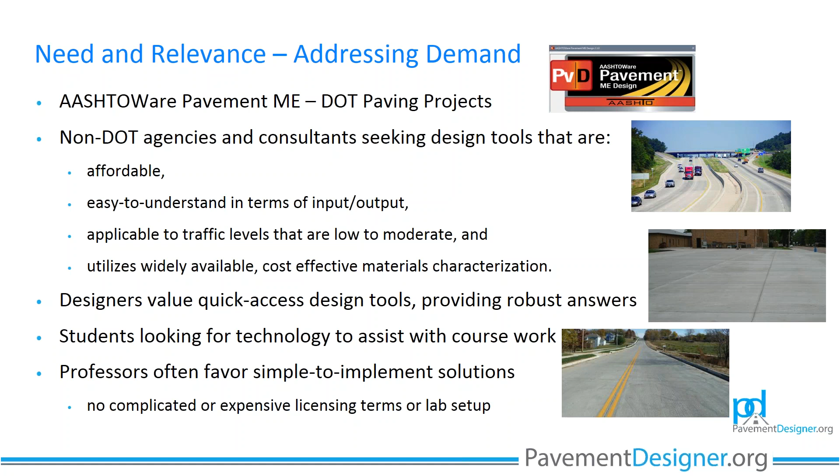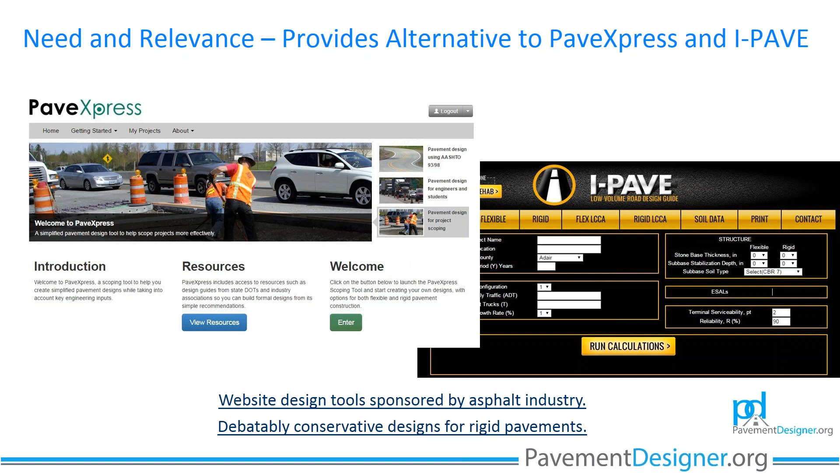to be able to understand how to do concrete paving design. Another reason we wanted to make sure there was an easily accessible and robust tool out there is because there are other tools out there sponsored by other industries. What we've found is those tools have what we consider very, very conservative designs for rigid pavements. We've looked into this extensively and did some reporting on it.

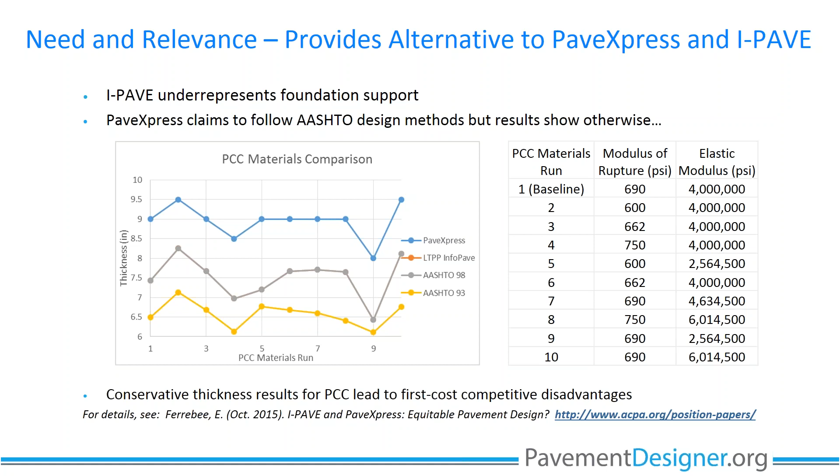So we wanted to make sure there was a robust, accurate tool available to users in the marketplace.

Another reason we wanted to put the website together is because if you were to go out and Google programs for designing concrete pavements, you'd get a lot of different software identified. Whether you're doing structural design for jointed plain concrete pavements, overlays, roller compacted, or parking lots, there was a wide array of tools available, and it could be confusing trying to figure out the best choice for software to implement.

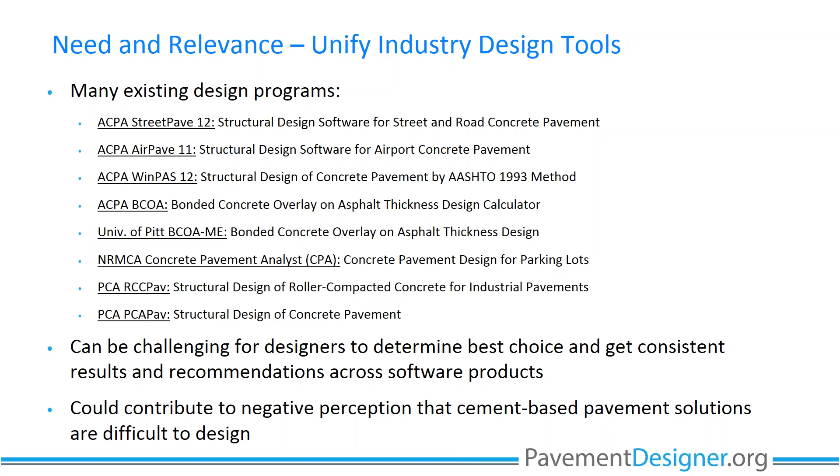That really contributed to what we'd consider a negative perception that cement-based paving solutions are difficult to design. So we wanted to make it as easy as possible for those designers that want to do concrete pavement design. Putting all of that into a single website was really the motivation.

Through our partnership with ACPA, PCA, and the RCC Council, we've developed this website for streets and roads, parking lots, and also intermodal or industrial facilities. The tools will help you design jointed plain concrete pavements - those are concrete without reinforcing steel, although they can include steel dowels at the joints - for continuous reinforced concrete pavement, concrete overlays, and also composite pavements.

These are types of pavements that have treated base materials - also roller compacted concrete, cement modified soil, cement treated base, and full depth reclamation with cement. Those are what we'd consider the composite pavements.

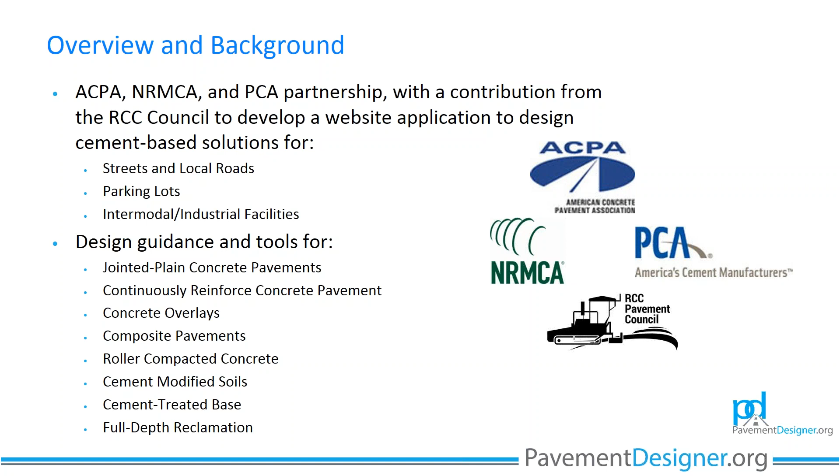The idea was to take all of these various software programs and put them into a website usable for multiple platforms, whether working off a PC, a laptop, or even a tablet. We wanted to make it as easy as possible for users to develop appropriate pavement thicknesses for concrete paving.

Now this shows what we'd consider the map for the website. Across the top, if you're doing parking lot design, street design, or intermodal design, it shows the various options available to you and the design methods available as well.

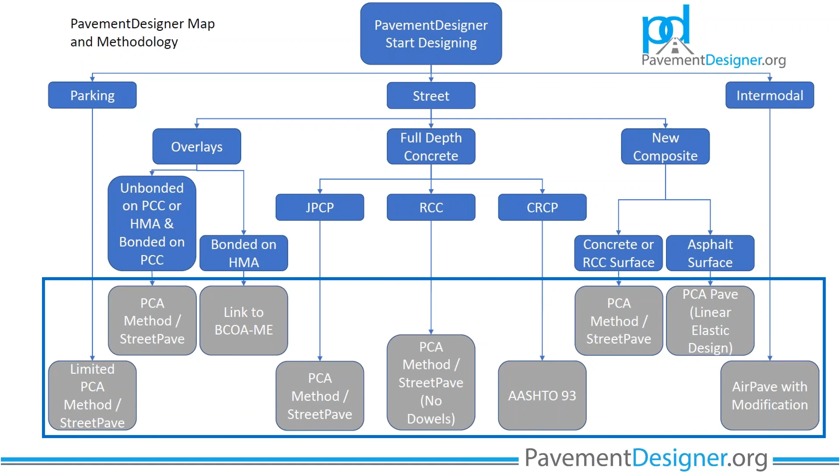You can see under street, for example, if we're doing a concrete street, we have options of jointed plain concrete pavement (JPCP), roller compacted concrete (RCC), or continuously reinforced concrete pavement (CRCP). It shows the different methodologies at the bottom for each of those designs.

Concrete pavement thickness design basically considers two different types of failure modes: one would be transverse cracks at mid-slab, and also faulting, which is typically a result of under-slab erosion.

The analyses we'll be performing today during the demonstration are very robust, like I've mentioned before, and it roots back to the 1960s PCA method for fatigue and faulting design, with some enhancements over the years. That design is really tailored for lower volume, low to moderate traffic volume parking lots and streets.

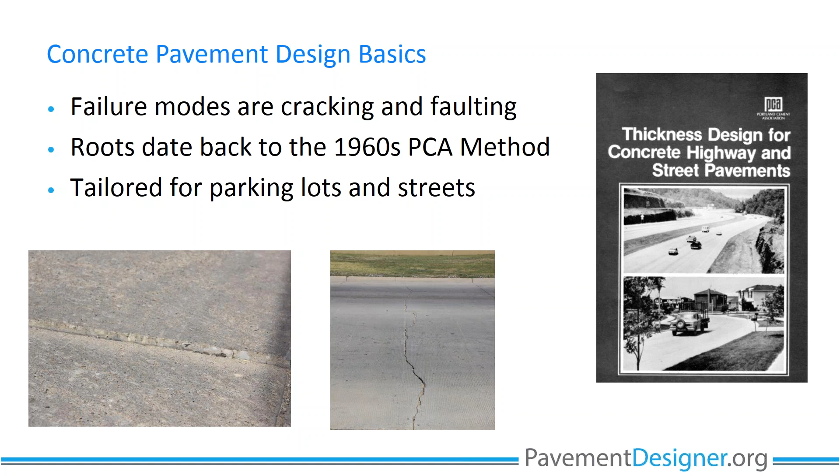When we're looking at determining fatigue properties or fatigue failure mode, we use what's called the limiting stress ratio. That's a calculated stress based on the loads on the pavement from the axles, divided by the concrete strength. We're trying to minimize that stress ratio by providing sufficient thickness to mitigate mid-slab fatigue cracks that can occur.

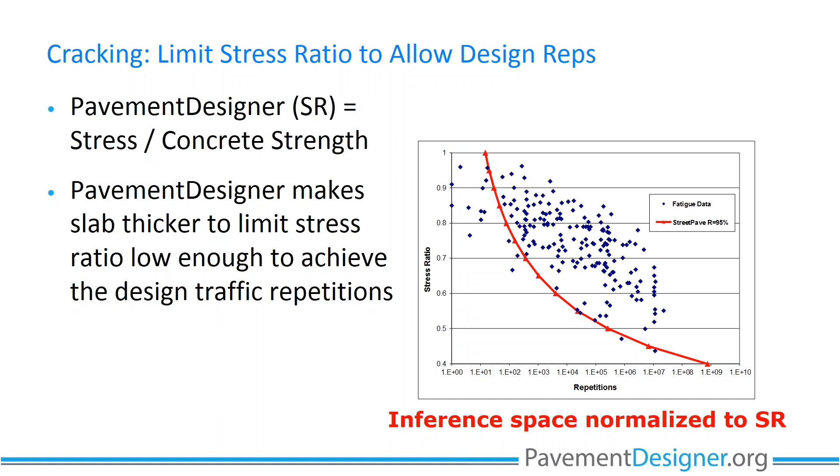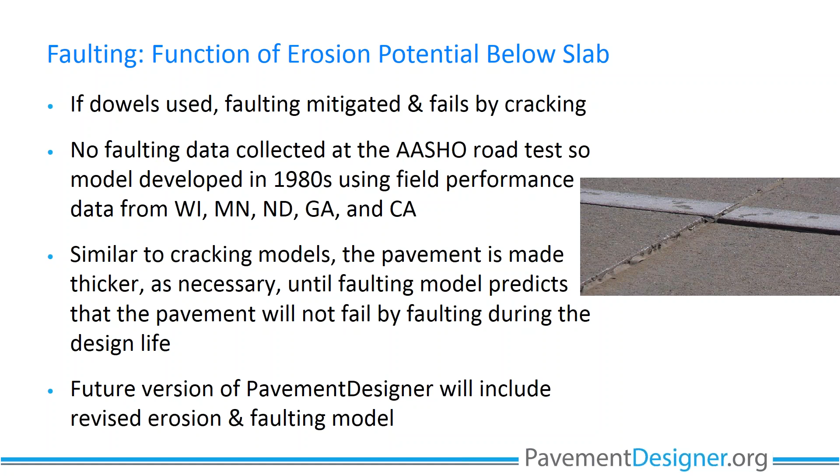We'll show you that a little bit further when we get into the actual design.

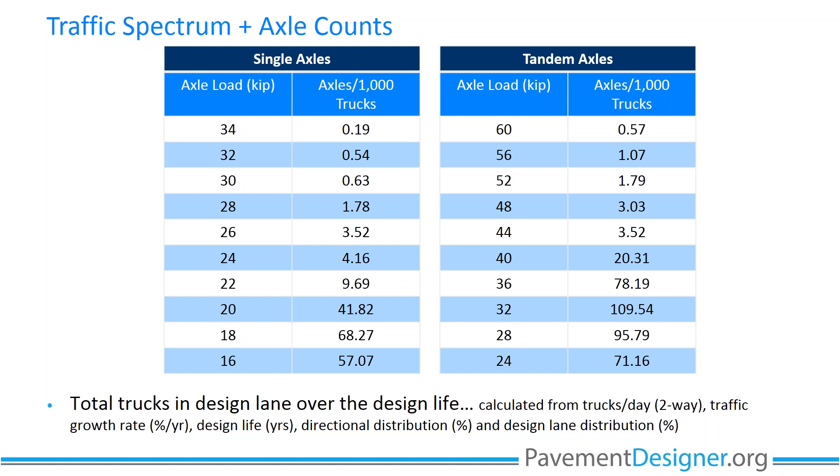It's important to understand the basis of the pavementdesigner.org website and where you can go for further reference when you're actually doing the design.

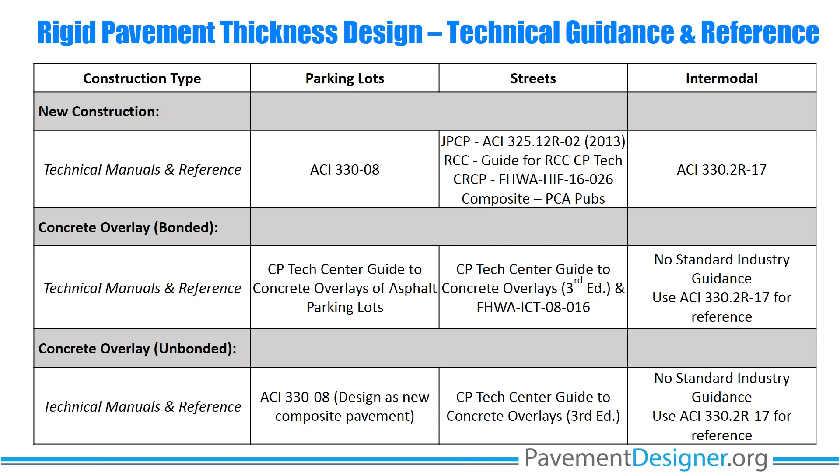Now, when we're constructing or designing new parking lots, good reference material is the ACI 330-08 Design Guidance for Conventional Concrete Parking Lots. This is developed by the American Concrete Institute, and you can obtain it through the concrete.org website.

This reference has great information on the design. It also has design tables, so if you just need to do a very quick design and you know your traffic and soil conditions, you can enter a table and determine what thickness of concrete you need. If you need to go a little further, you can jump into the pavementdesigner.org website and actually conduct a design there.

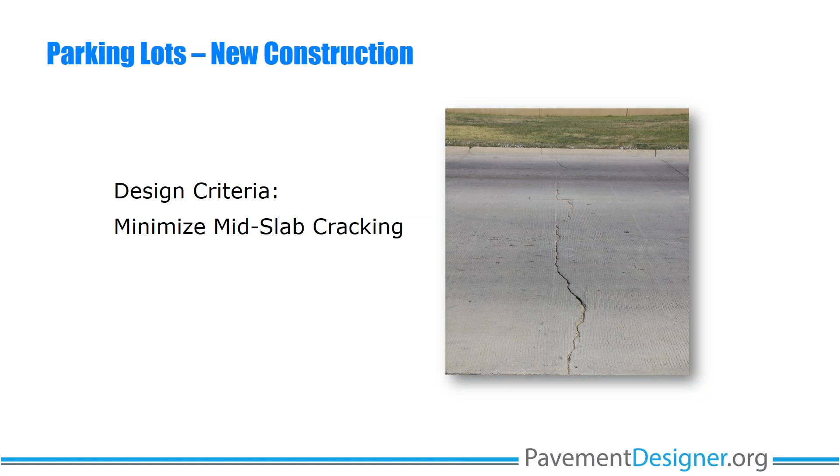When we're doing parking lots, the design criteria we're looking at is minimizing mid-slab cracking. Typically in lower volume parking lots, faulting is not an issue, and we can mitigate potential erosion issues just by doing subgrade stabilization or putting a non-erodible base underneath our parking lot. So faulting is not considered as a design criteria in parking lots in pavementdesigner.org.

NRMCA has a lot of really good information on how to design parking lots. We have an ACI 330 quick reference guide, a frequently asked questions guide, and collateral that talks about lighting benefits. We also offer a design assistance program where we can help you design that parking lot, making sure you're using all the right inputs and specifying all the appropriate materials and construction properties in your specification.

You can go to the paveahead.com website to get that design assistance. Just simply fill in your information and it'll send us an email, and we'll get back to you to help you design your project.

Now, if we're doing new construction for a street and we're doing a jointed plain concrete pavement, then the ACI 325.12R guide is what we recommend for reference.

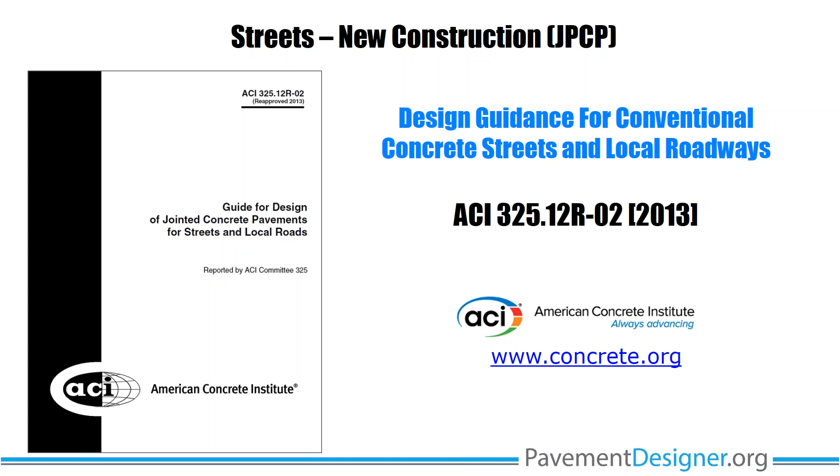When we're designing streets, in terms of new construction for jointed plain concrete, our design criteria is to minimize faulting and minimize mid-slab cracking. Those are the two failure modes considered, and I'll show you how you can see your fatigue life and erosion life as it develops over its design life when we do the demonstration of the program.

Again, NRMCA has some good technical support for designing concrete streets. We have a rigid pavement technical assistance resource for local jurisdictions. You can get that at paveahead.com under the resources page. It has various tabs within that document that help in terms of how to design, how to classify traffic, when to use a sub base or not, when to use dowels or not. It has a lot of really good information for those just getting started with designing and constructing concrete pavements.

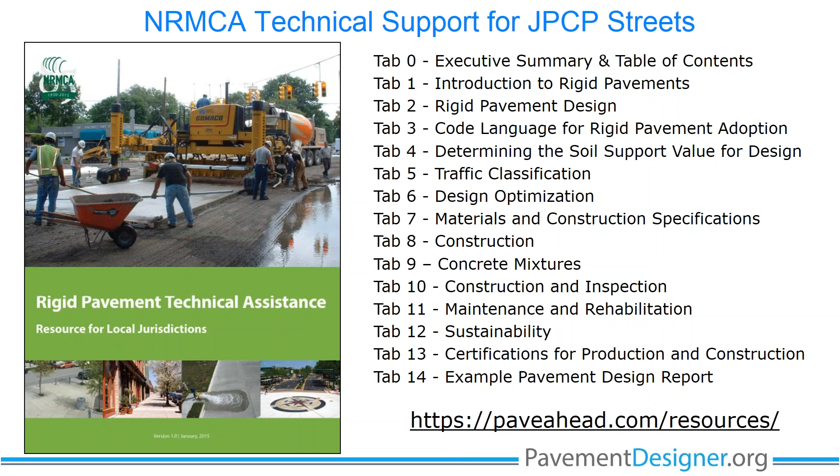Now, if we're going to design a continuously reinforced concrete pavement for new construction in the street, we recommend utilizing the FHWA's report for continuous reinforced concrete pavement. It's design guidelines for construction, maintenance, and rehabilitation. You can also go to the crcpavement.org website.

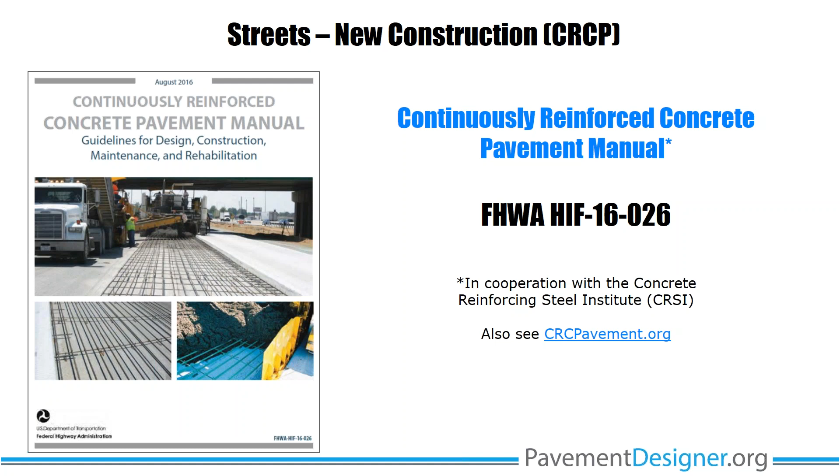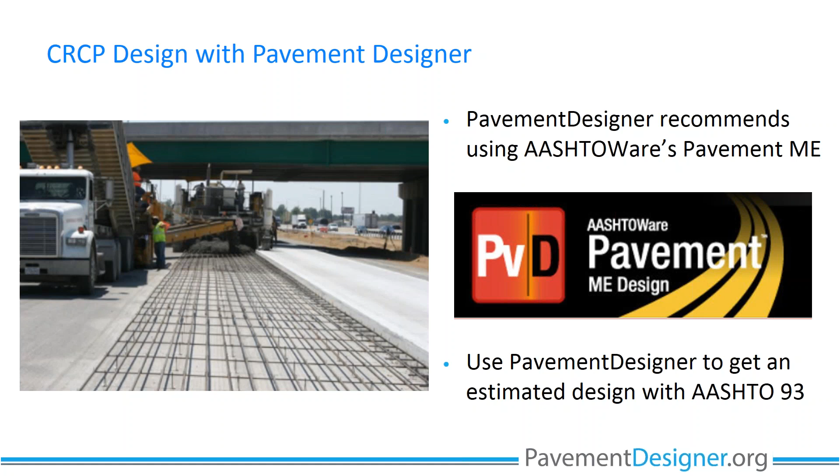Now, I will say, when you design using pavementdesigner.org doing CRC pavement, the website will pop up a little box that says we really recommend using AASHTO Ware's Pavement ME, but if you want to go ahead and design a CRC pavement with pavementdesigner.org, you can do that, but we're going to be utilizing in that software the AASHTO 93 design guidance.

What does that utilize? Well, you get your steel percentage based upon the steel reinforcement by crack spacing, maximum crack width, and the maximum steel stress. So again, we really typically recommend that you use the AASHTO Pavement ME for CRC design, but you can use pavementdesigner.org to get a quick and dirty check.

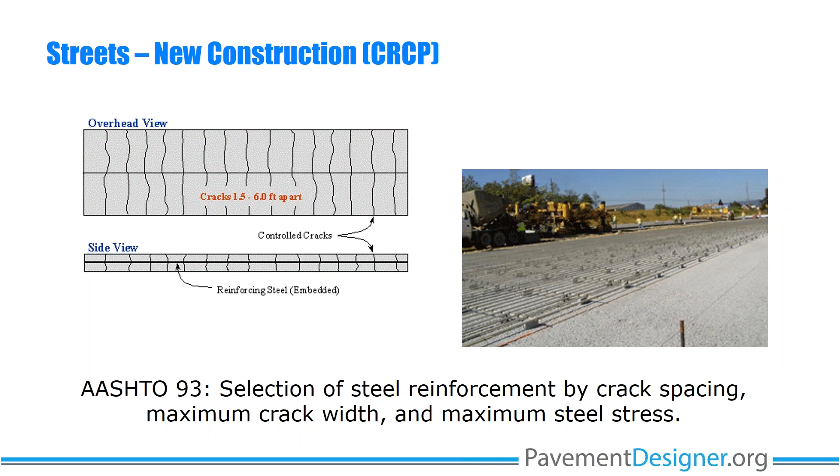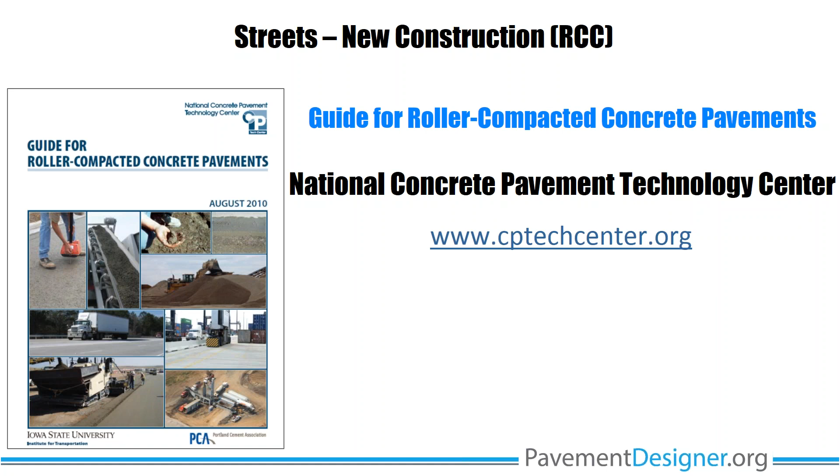Also, if you're doing a street new construction and want to use roller compacted concrete, you can choose that. The reference I would recommend is the National Concrete Pavement Technology Center's Guide for Roller Compacted Concrete. When designing RCC for a new street, the design criteria is faulting and mid-slab cracking.

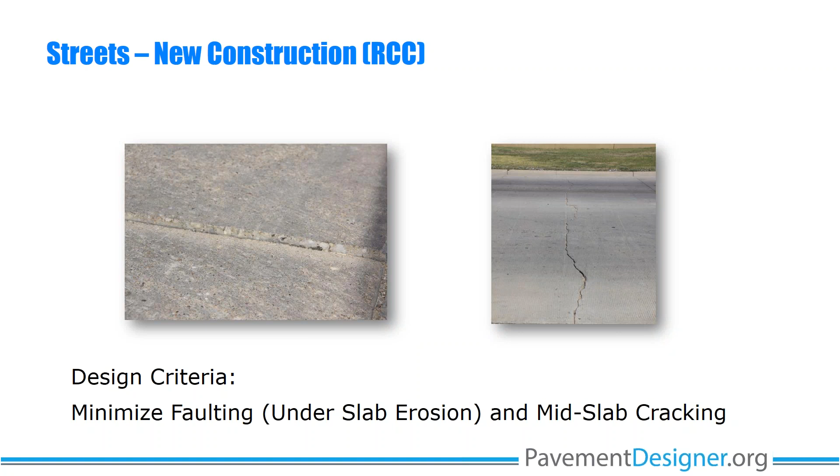And then lastly, for streets, when doing new construction using a composite pavement, typically that is when we are doing full depth reclamation with cement and then putting a thin concrete surface on top. We can also design using a cement modified soil or a cement treated base. The reference for full depth reclamation comes from the National Concrete Pavement Technology Center in conjunction with the Portland Cement Association.

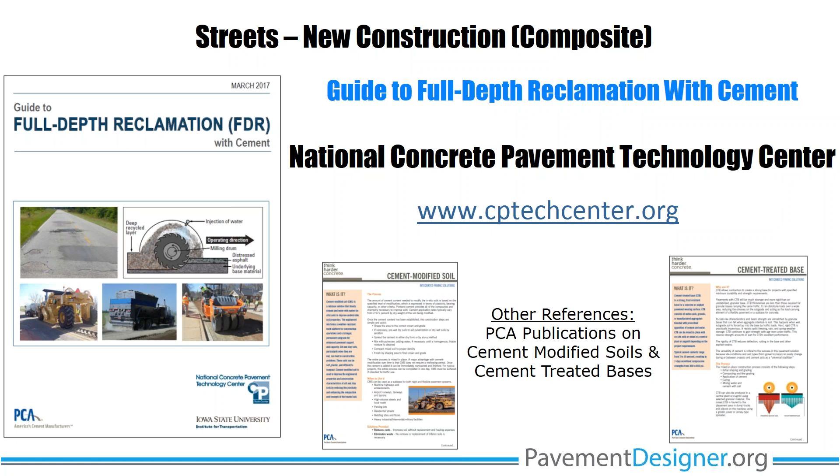That report is what we recommend for FDR. If you're using cement modified soil or cement treated base, reference material from PCA can also be utilized to help you with that design methodology.

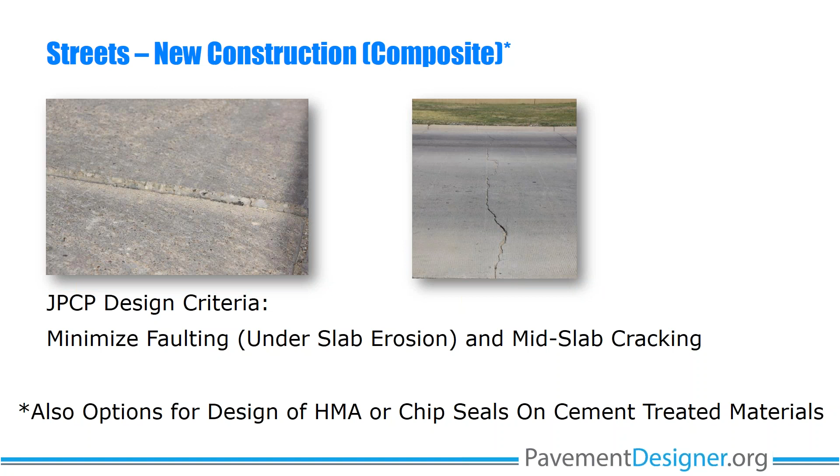When we're looking at jointed plain concrete in the new composite paving design, what we're using as a failure criteria is faulting and mid-slab cracking. We do have in pavementdesigner.org options for design of a hot mix asphalt surface or a chip seal surface on top of treated base materials. Probably won't have time to demo that option today, but in future webinars we'll do that.

Now, when we're doing concrete overlays, particularly in parking lots, the reference we suggest is the National Concrete Pavement Technology Center's Guide to Concrete Overlays of Asphalt Parking Lots, or what we call the Green Book. This is a great book with design tables in it as well. If you just need to do a very quick design, you can enter into tables. If you need a more robust design, you can utilize pavementdesigner.org. This is for bonded concrete overlays on asphalt.

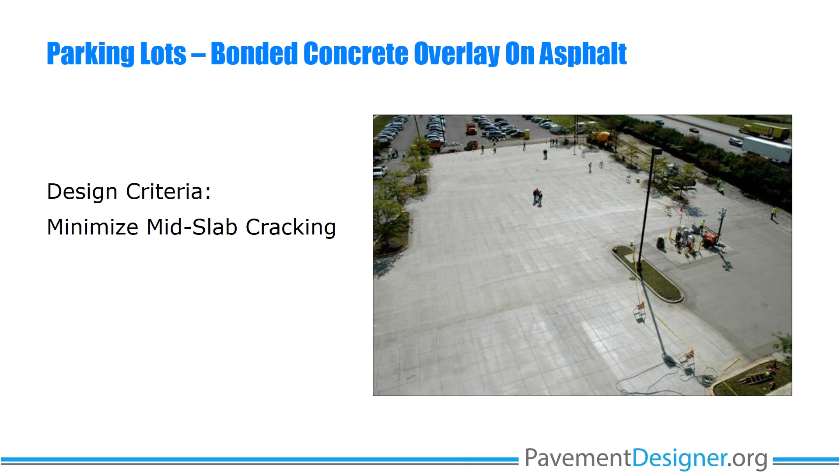Typically, the design criteria used there is mid-slab cracking. I'll show you briefly in the demonstration that there is another website that we link to when doing bonded concrete on asphalt, and I'll show you that during the demonstration.

If you're doing bonded and unbonded concrete overlays, either on concrete or asphalt for a street, there's another guide by the CP Tech Center, what we call the Blue Book, 3rd edition. Utilize that reference. There's a little bit of repeated information between the Green Book and the Blue Book, but they really have two separate purposes. So if you're going to be doing an overlay for a street, use the Blue Book.

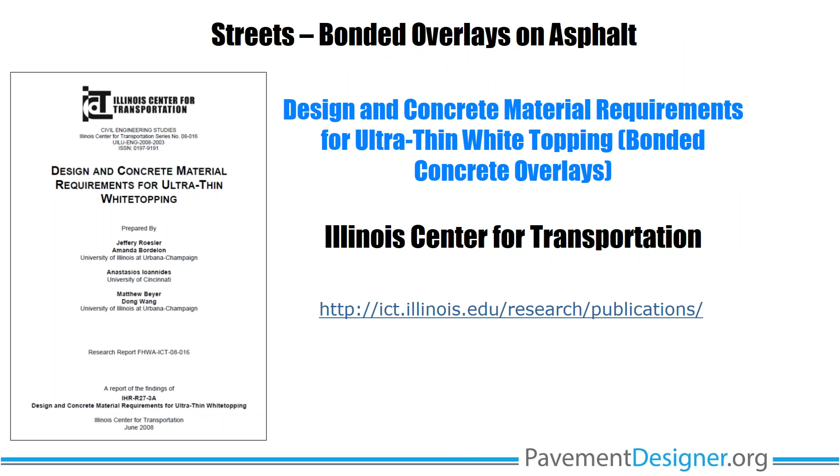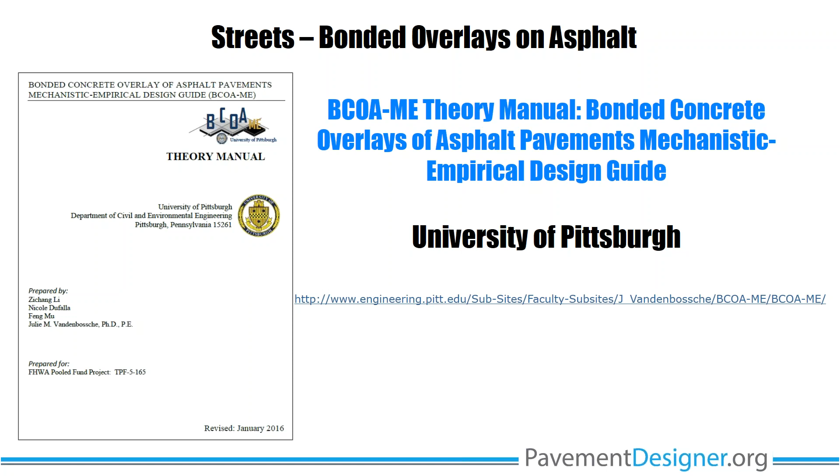More information for streets on bonded overlays of asphalt: the Illinois Center for Transportation has a great reference there. It was published in 2008, but still has very good reference and gets into a little bit of the design theory, as well as the University of Pittsburgh's BCOA-ME program that we transfer you to in pavementdesigner.org, which also has a theory guide for reference. So that's a good one. When we're doing bonded concrete on asphalt for streets, there's 2 or 3 good references for you there.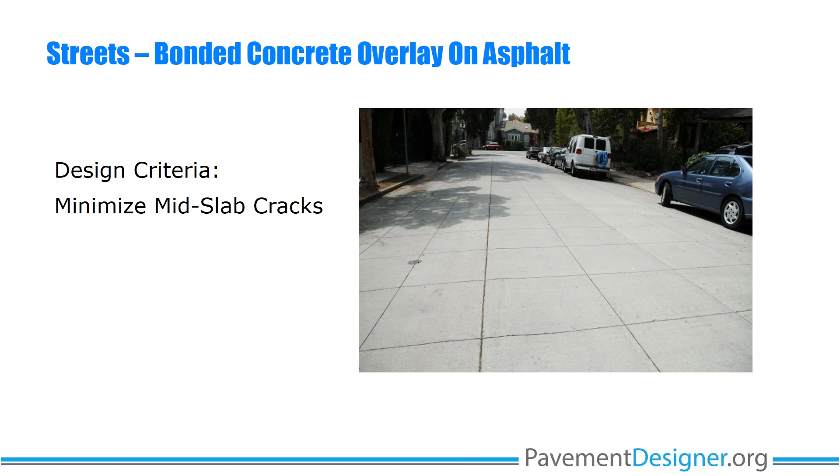When we're doing bonded concrete on asphalt for streets, the design criteria we're designing for is minimizing mid-slab cracks. For intermodal new construction for jointed plain concrete, the reference we suggest is ACI 330.2R. This is different than the ACI 330-08 for standard parking lots. This is for industrial and trucking facilities.

A lot of really good reference information in there for these more heavy-duty designs. Here, what we look at is focusing on minimizing cracking through that stress ratio. We do that in the other designs too, but it's done kind of behind the scenes. On the intermodal design, it shows you very plainly what the stresses are that are calculated for various configured heavy non-over-the-road type vehicles, those being gantry cranes, forklifts, and things of that nature. I'll do a quick demonstration of that as well.

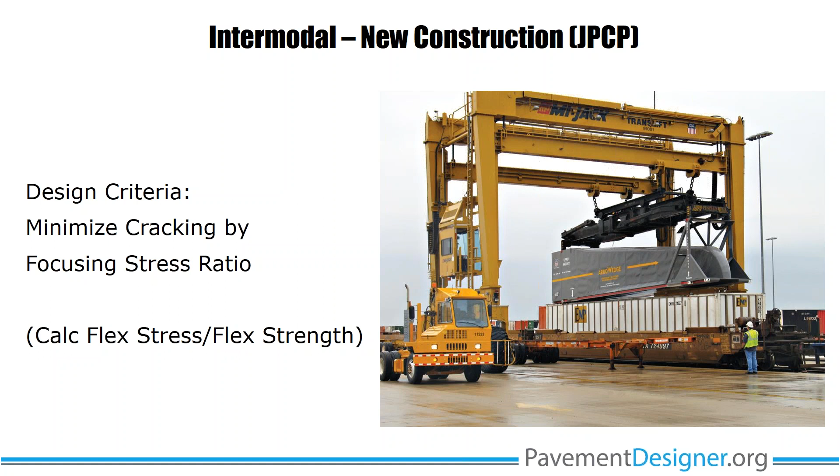One thing we have not talked about is pervious concrete. Pavementdesigner.org was not really developed for doing pervious concrete design, although it can do the structural design. Pervious concrete is a no-fines concrete that allows water to flow through it, then through a permeable base material and into the subgrade and down to the water table.

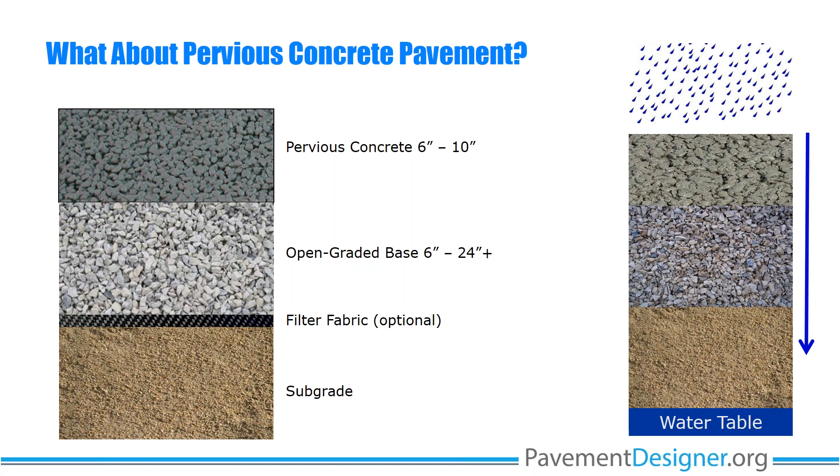There's a couple of different ways that you design pervious concrete. You do have to do a structural design to make sure it can handle the traffic conditions, and you can utilize pavementdesigner.org for that. But that's really for those who understand the material properties of pervious concrete. If you have not done that, I would suggest you seek out some design assistance through NRMCA or some of our partner associations.

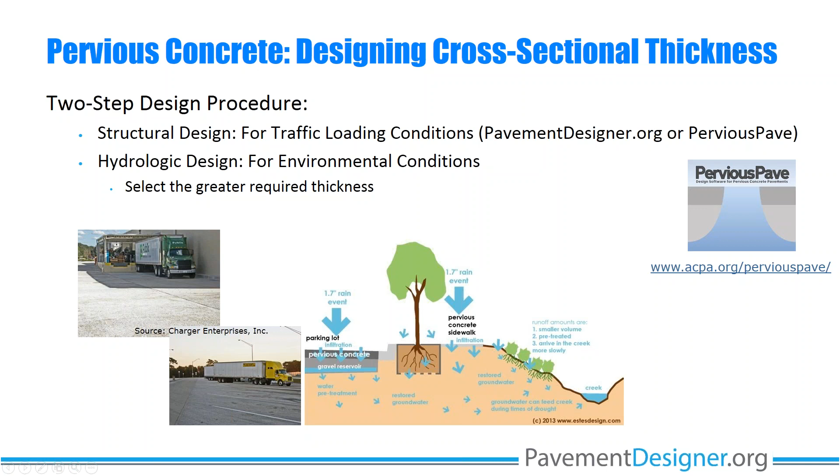We also have to do a hydrologic design for the environmental conditions, so we understand whether the pavement and base can handle the water being discharged onto the pavement. You can utilize ACPA's Pervious Pave to do both a structural design and a hydrologic design. There are other types of design methodologies out there for pervious pavement. If you need help, you can go through the ACI 522 R-10 report, or just contact one of the partner associations, and we'll be glad to help you.

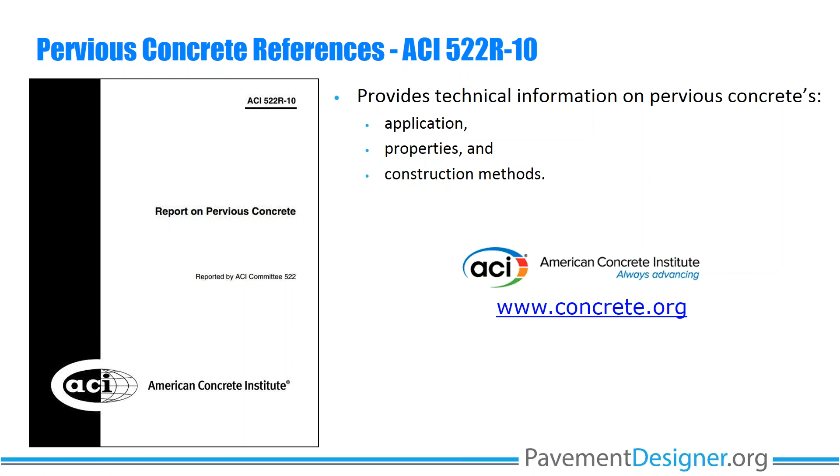In summary, pavementdesigner.org's primary audience is really city, county, and consultant engineers who are designing concrete pavements—not really for highway type design. A secondary audience would be professors and students. The goal was to unify these design methods out there, providing industry promoters and our primary audience, those designers, a single source to direct target audiences to get robust and consistent answers, and we think that's really important.

We made it a web-based platform so it appeals to folks who have been using the various concrete pavement softwares in the past, and also to future generations of design engineers. We had great broad industry support from all the different associations and from many of the member companies in those associations as well. Most importantly, the website is free and easily accessible across all different types of platforms. That was really important to us—to make sure it was out there for people to utilize and give what we considered very robust and appropriate designs for their conditions.

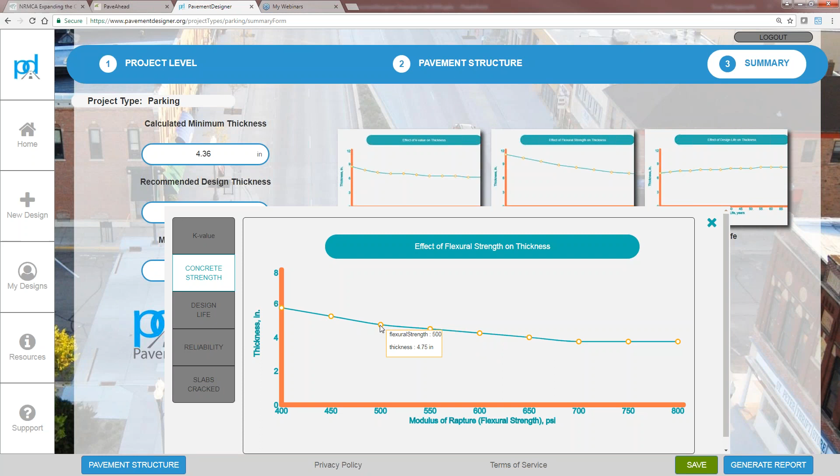If we were actually to change that, let's say, to a 500 psi flexural strength, what would that do to our design thickness? It shows there that it would increase to 4.75 inches. So we can look at various sensitivity plots.

Here's one for design life. You can see that once you get past about 20 years, the design is fairly insensitive to the design life.

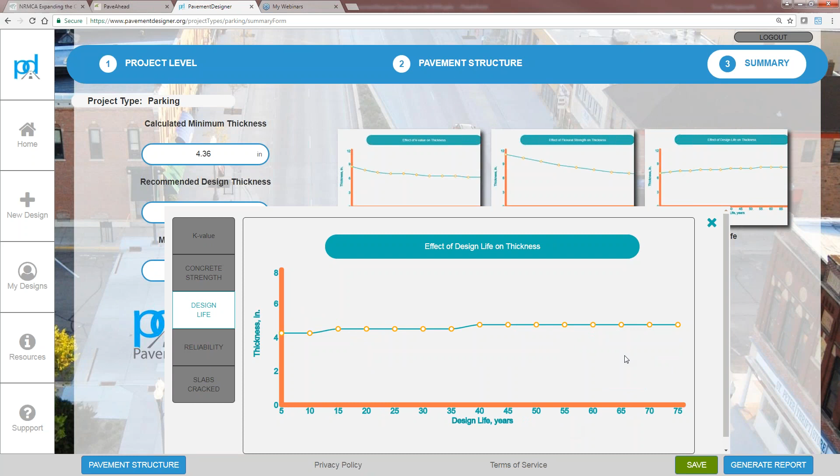Now, what we can do at this point is generate a report. I'll show you that when we get to the streets and roads section.

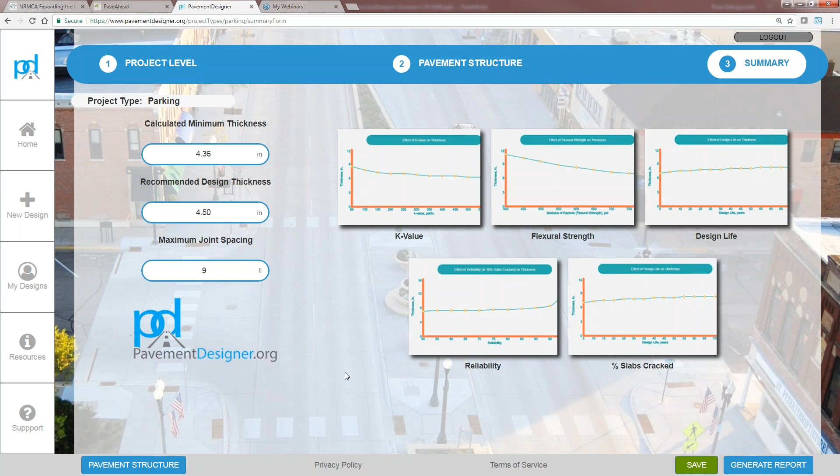Okay, so we can save this design if we want. We'll just call it the demo parking, that's what we input when we did our new design. We'll save that. It tells us up here on the right that the design was successfully saved. And if we went back to our My Designs, we would see that demo parking show up under My Design.

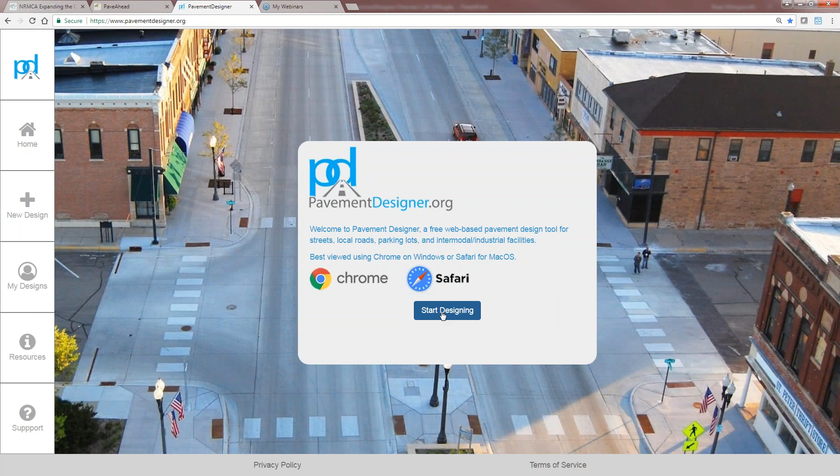Okay, let's go back to our home screen. And we will start another design. This time, we'll start a concrete street design.

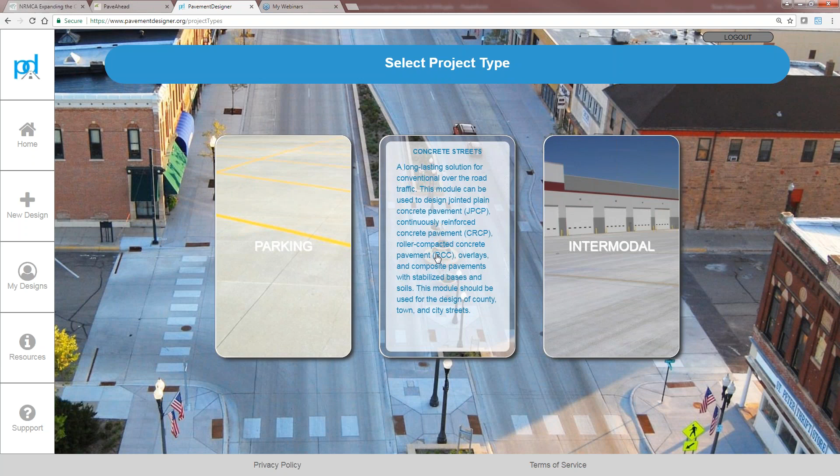When it comes here, if we're going to do a street, then we have the option of doing a concrete overlay, just a typical concrete street, or a new composite pavement. What we'll design here will be a concrete street, and we can do either a jointed plain, an RCC, or continuously reinforced.

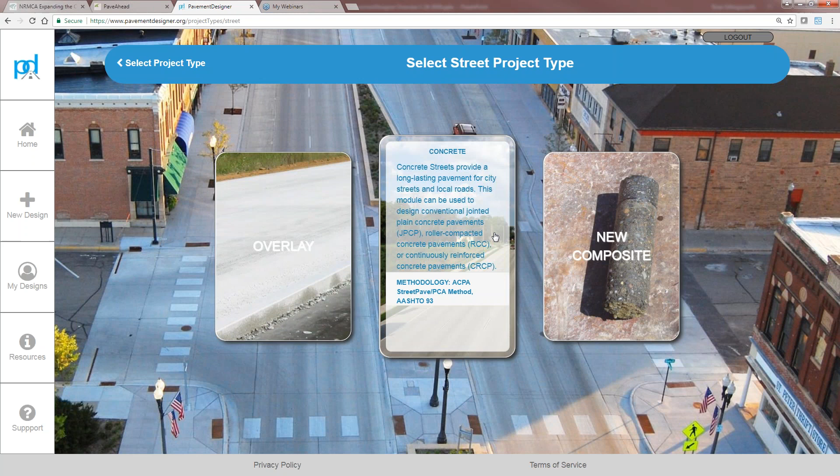So again, this screen should look somewhat familiar. It has a few more inputs than the parking lot screen did, because we wanted to simplify the parking lot as much as possible. But here you have to input information about your traffic, some of those global inputs like our reliability, and then we'll move on to the pavement structure once we do that.

Now, under the select spectrum, we have residential, collector, minor arterial, or major arterial. If we were to change one of those, you would see our traffic summary details on the right-hand side change. So what we're going to go to here is a collector street, and you should see some numbers change on the right-hand side under the traffic summary details.

So now what we have is our axle distribution per 1,000 trucks for our single and tandem axles for a collector street. Again, we're going to design it for 20 years.

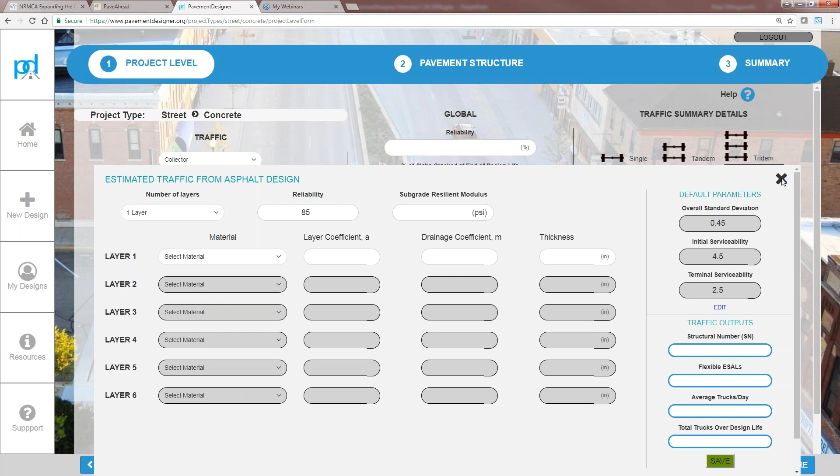Now, there's a couple of different ways you could go here. You can just input your trucks per day, traffic growth, directional distribution, and so on. Or if, for example, you had an asphalt design in front of you, you could estimate what the traffic numbers are for that design, and then utilize that in your concrete design so you can get an equivalent design. I won't go through that, but if you have that opportunity in the future, you can determine that total number of trucks from your asphalt design for your concrete design.

What we're going to do is just put in our trucks per day. Again, this is a two-way traffic number, so 300 trucks per day. The traffic growth rate of 0.5% per year. Directional distribution 50%. So what does this mean?

Turn on the help screen there. So what this means, this is our directional split of traffic. If you have an even split of traffic in both directions, then you would enter 50%. If you didn't have an even split, you might split it 60-40. But typically in terms of directional distribution, that's 50%.

Our design lane distribution indicates that if you have two or more lanes going in one direction, then we might put say 80 or 90% of our design lane traffic in the outside lane. For example, if we have a 2-lane or a 4-lane street, 2 lanes in each direction, our design lane, we might put, let's say, 80% of our traffic in that outside design lane.

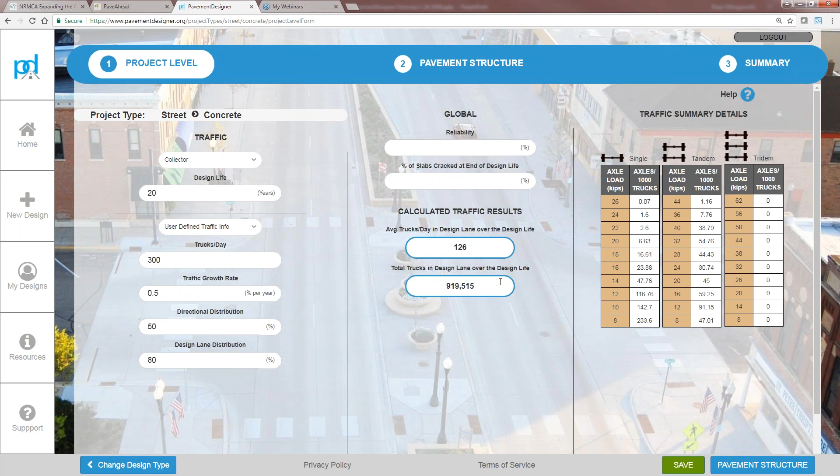Once we input that information, it shows us our average trucks per day in the design lane over the design life. So we have 126 trucks on average per day, and we have a total trucks in the design lane of about almost 1 million.

We input our reliability value. We'll put 85%. We only want to see 15% of our slabs cracked at the end of the design life.

Once we put all of that information in, we now have the option of choosing what is going to be our surface material. Are we going to use jointed plain concrete pavement, roller compacted, or continuously reinforced? For this example, we'll go to the jointed plain concrete pavement.

Again, now we need to input our material characteristics for our subgrade, for our concrete, and then also choose whether or not we're going to have any subbase layers. So here we have the option of putting in our resilient modulus value for our subgrade, or we can choose a California bearing ratio, the CBR value, or an R value. We'll keep resilient modulus value, and we're going to put in a value of 4,500 psi.

Here, what we'll do is put in our 28-day compressive strength instead of our flexural strength. We'll specify a compressive strength of 4,000 psi, and it will calculate the flexural strength associated with that, about 580 psi. If we don't like that number, we can change our compressive strength to, say, 4,200 psi, and see how it changes the calculated flexural strength. Now we're a little closer to 600.

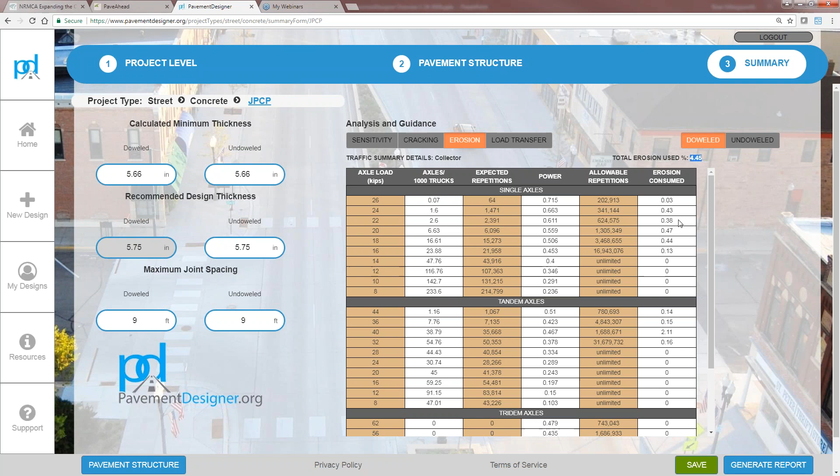We can also look at our erosion table, and it shows you again those same axle distributions and the contribution to the erosion consumed. You can see up in the top right that only about 4.5% of our erosion life, if you will, was used. So we can see that without the real heavy axle loadings, that erosion underneath our concrete was not really a problem.

If you do want to put in dowels, you just simply look over here at this load transfer screen, and it will give you some recommendations on when dowels are appropriate and what the diameter of those dowels need to be, and it will show you where you can get more information about doweling.

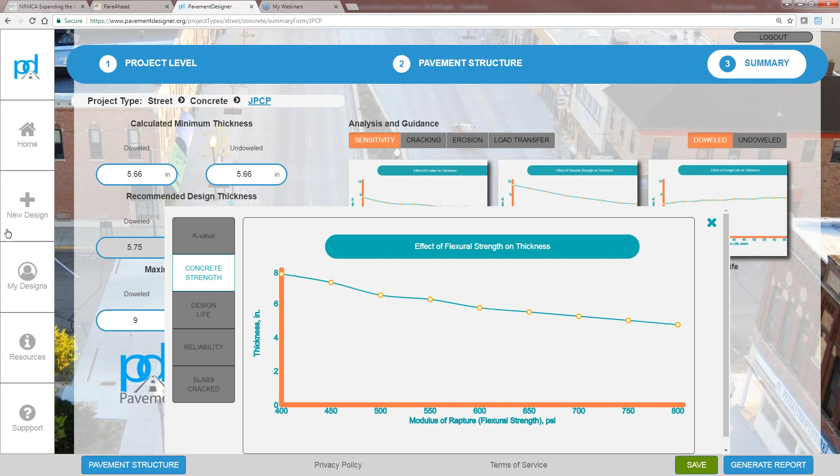Now, if we want to look at these sensitivity plots, we can look at our flexural strength, for example. We had a flexural strength of about 600, so our recommended design thickness is 5.75 inches. I'll note that in the past, we've typically only done recommended designs to the 1/2 inch, so if it was 5.6 inches, we would round up to a recommended design of 6 inches. Because of the new paving technology out there, you can get to some fairly significant, or fairly sensitive, thicknesses, so we decided to round up to the nearest 1/4 inch. That's what it shows on the screen, and also on your report.

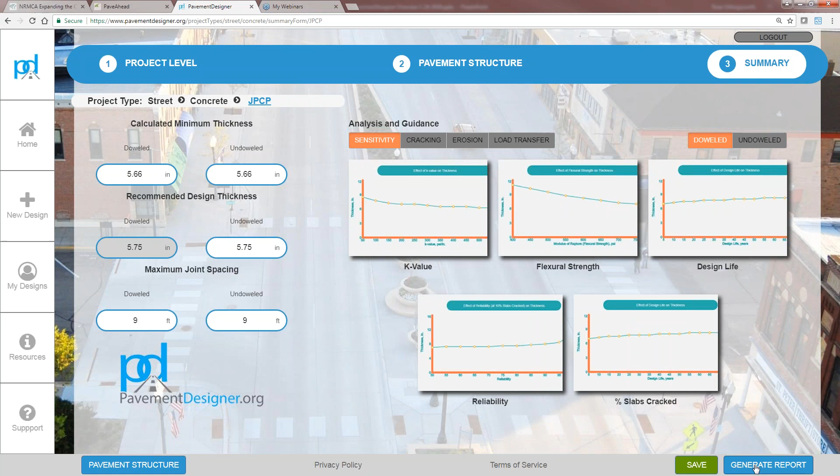So if you do want to generate a report, you come down here to the right-hand side and input the information.

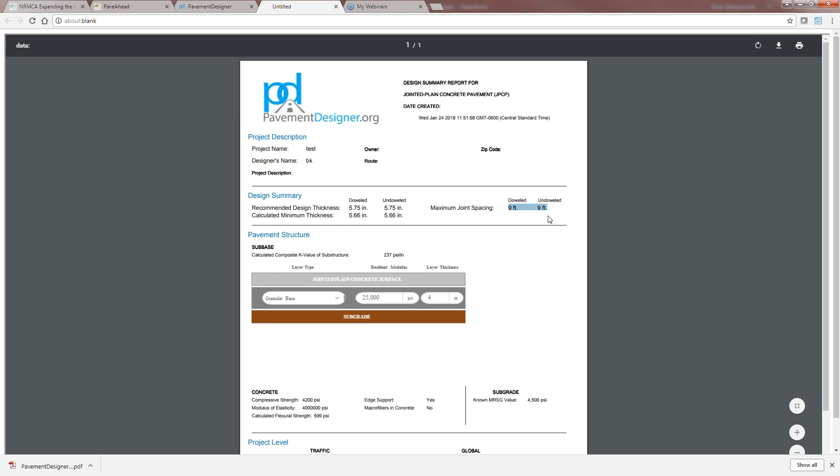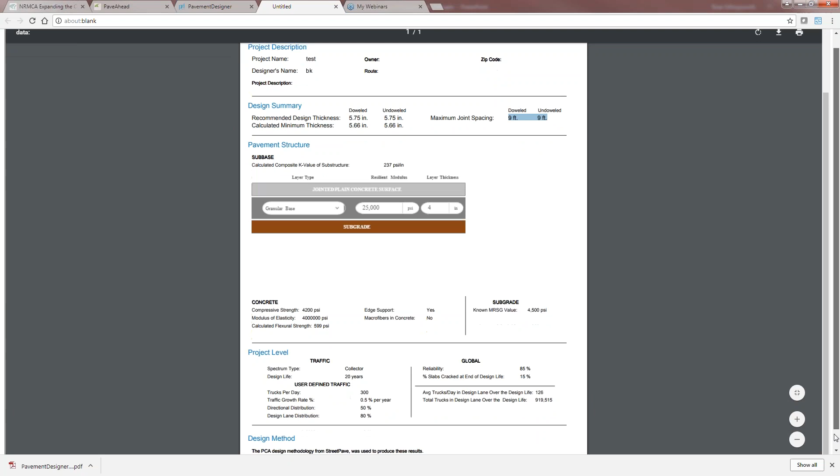Once you've done that, you can download and view the report. We'll download a PDF and show you the report. On that report, we have the summary block at the very top, a design summary that tells us the recommended design thicknesses and the maximum joint spacing needed. It shows a graphic of the subbase thickness and properties, and down at the bottom, it shows the design methodology utilized to produce those results—the PCA design methodology implemented in StreetPave. So you can get that report there.

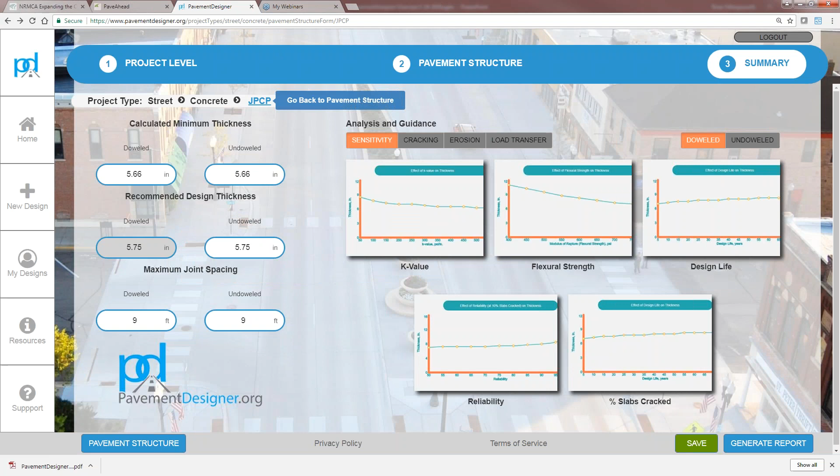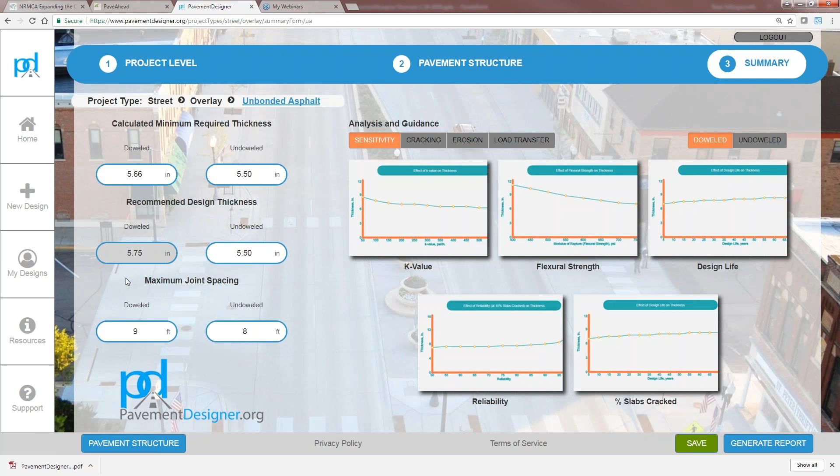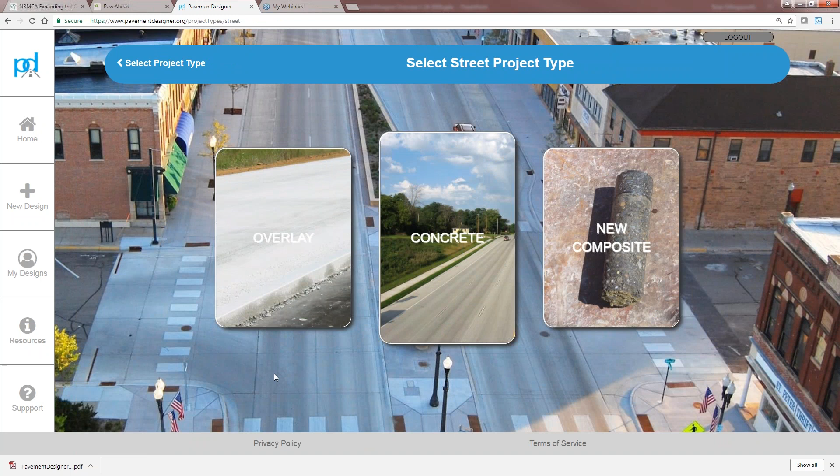All right, now just very quickly, I want to run through an overlay. Let's go back here. We'll start and do street design, and what we want to choose now is an overlay. I'll run through this fairly quickly since we've already done it a couple of times. I'll input all of my information.

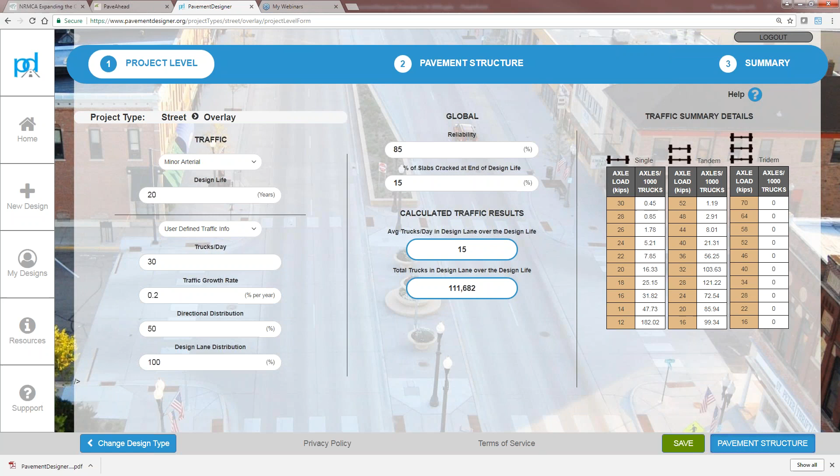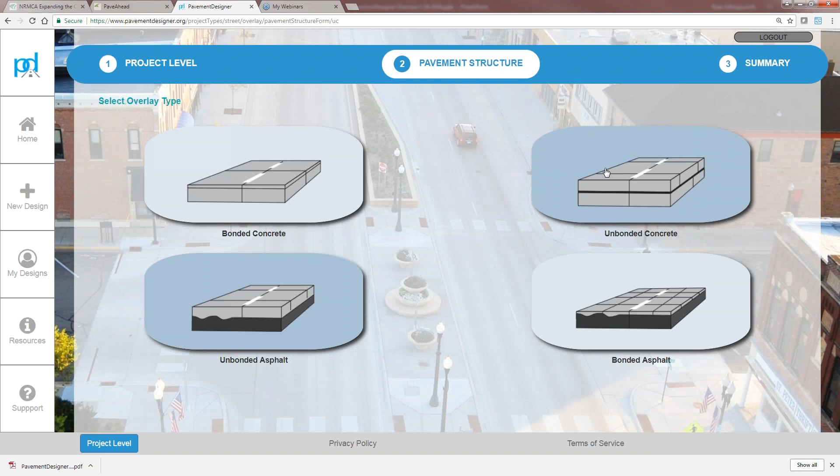Once we've input all our information about traffic and reliability, we come to a screen where we choose the type of overlay: bonded concrete, unbonded concrete, unbonded asphalt, or bonded asphalt. If we choose bonded asphalt, it takes you out to the BCOA-ME website to do your design and generate your report there. We did not want to replicate that website within pavementdesigner.org—it was already a great website with good information and data, so we didn't want to repeat that. It just takes you out to that website. We won't go there right now, but if you have the opportunity, you can check it out.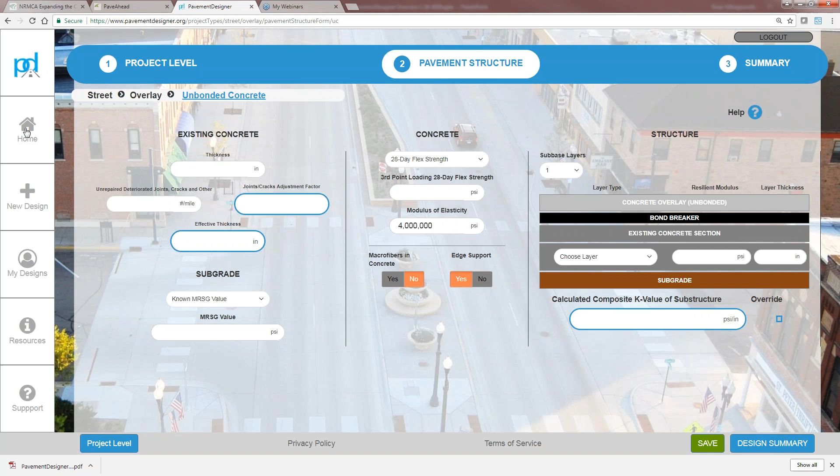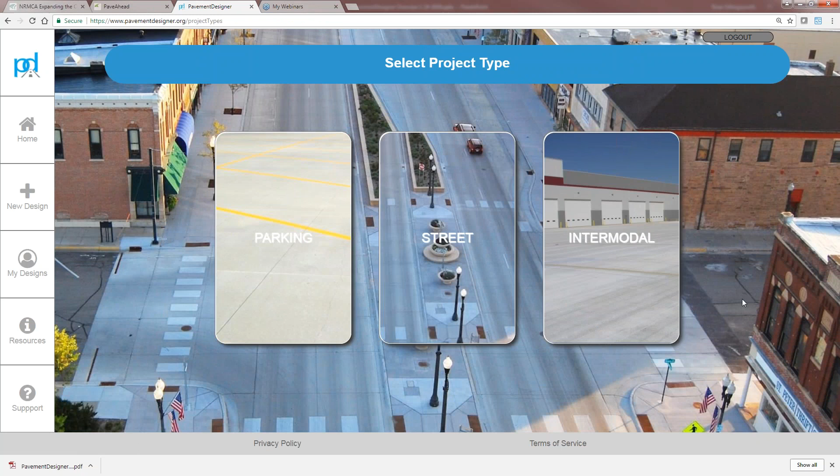All right, the very last one I want to show you is the intermodal design. We come back to our main screen and hit intermodal. The intermodal has some predefined project vehicles—forklifts, straddle carriers, container trucks, those types of things. You can select one or multiple vehicles to design for, or as you can see in the upper right, you can input your own customized vehicle.

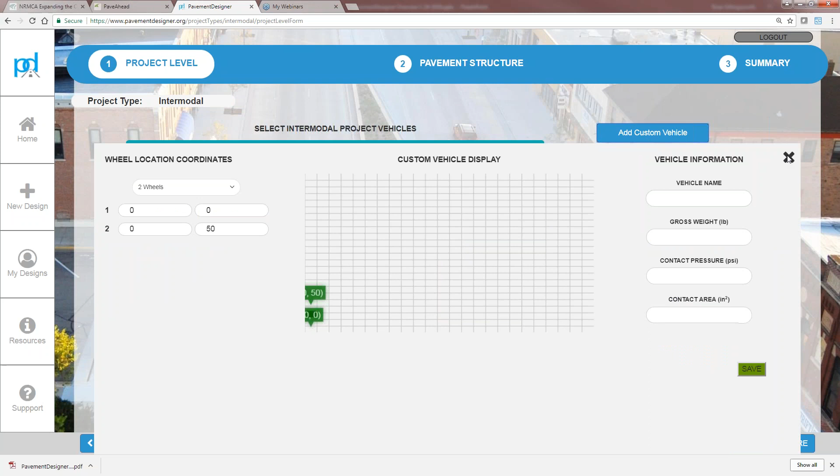You could add your vehicle, inputting the number of wheels, where they're spaced, weight, contact pressure, contact area—that type of thing. So you can add a custom vehicle there. We're not going to do that; we'll just look at a couple of different vehicles, maybe a forklift and a container handler. They have different wheels, or a number of wheels, that you're designing for.

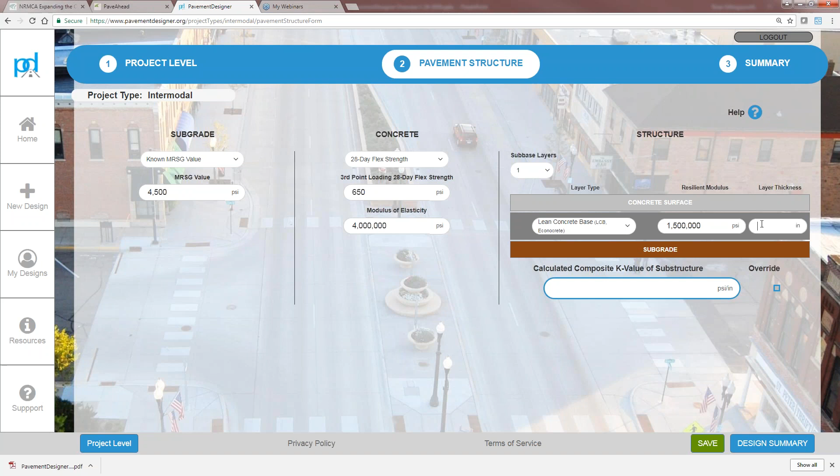Now we'll go to our pavement structure. Again, we put in the appropriate information, what our flexural strength is. We'll have one subbase layer—let's say a lean concrete base of 12 inches. It will determine a K value for you, a composite K value based on your subgrade stiffness and the stiffness of your base material.

And then we run that design, and what it's telling us is that the container handler is the primary vehicle we want to design for, at about 15 3/4 inches. That's reducing our stress ratio to about 0.5, so we'd use a 13-foot joint spacing there. You can, again, generate reports and so on from there.

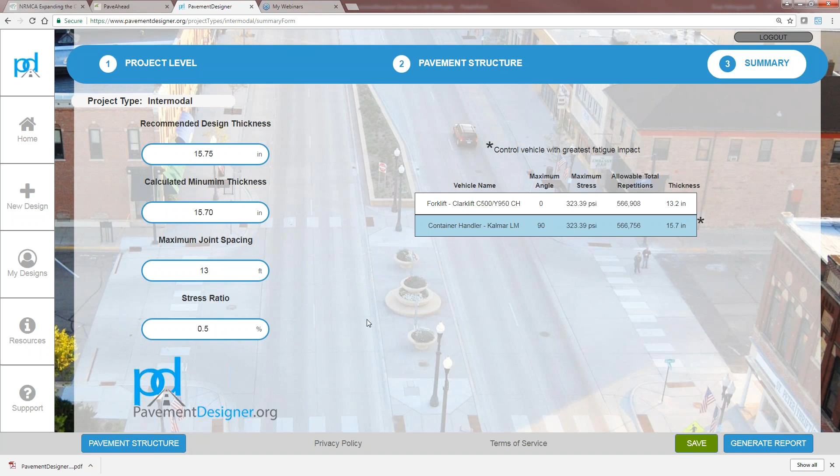Okay, that concludes the demonstration portion. I'll go to the question and answer box now, and we will try to answer some questions.

The first question asked is, can I touch a bit on the geotechnical part of the investigation and design? That's a great question. Characterizing the subgrade is one of the most important things we can do in pavement design. Generally, for streets, roads, and parking lots, asking your geotechnical engineer to do a few borings around the pavement site and running the California bearing ratio for the different materials encountered is sufficient to characterize the subgrade. Other things you want to know are whether you have expansive soils and a shallow water table—things like that can affect the pavement over time.

So it's important to understand that, and we utilize that data and information to tell us whether or not subbases are needed, or whether we might want to go ahead and dowel a pavement. We utilize geotechnical information to do that. I highly, highly, highly recommend that you get a geotechnical investigation for each of the projects you're going to do, whether it's a street or a parking lot. I think that's important.

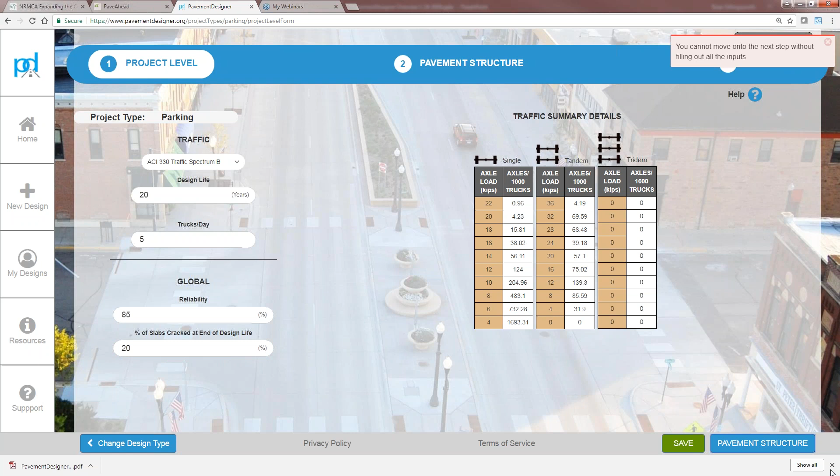Why are there two different areas for changing the subgrade strength in the parking lot design? If we go back to the parking lot, we put that information in, and we can input that calculated soil type here, so we can select it right here and it calculates the resilient modulus value, and then it also calculates the K value for you right here. It's the K value which is used for design, but many times we do not run a test to generate that K value, so that's why we input the subgrade value and then it calculates these values for you right here. The resilient modulus subgrade is just the value that many pavement designers are familiar with, and we utilize that as information, but when we actually run the design, the K value is used.

Next question is, how does the trucks per day relate to the traffic summary detail list? What we're saying is there's going to be a certain number of trucks per day that go over our pavements. It's not just going to be a single type of panel truck or an 18-wheeler truck. We're going to have a certain amount of heavy vehicles, and if you measure the axle loads of those heavy vehicles, you're going to have that distribution tied to the street type - whether it's an arterial, a collector, or a residential street, or that traffic spectrum of A, B, C, D, or E for the parking lots. You can go into the help screen, and that will give you more information about the relationship between the number of trucks per day and the total number of axles and the weight of axles that we have.